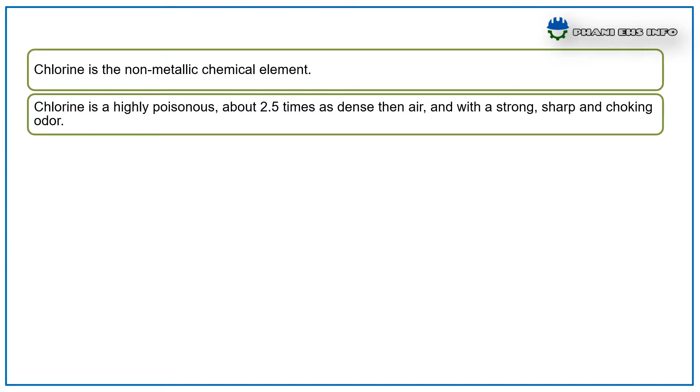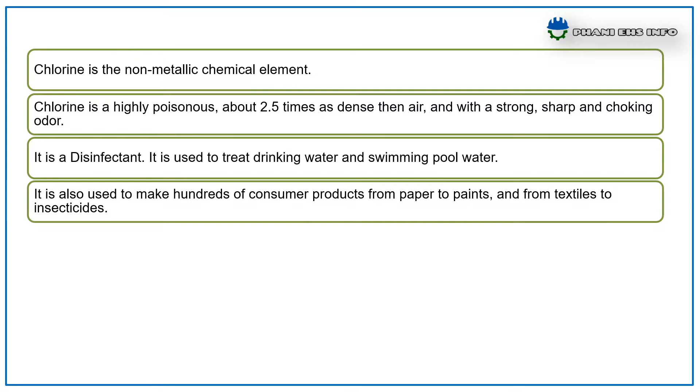Chlorine is a non-metallic element. It is highly poisonous, about 2.5 times denser than air, with a strong, sharp and choking odor. It is a disinfectant used for drinking water and swimming pool water, and is also used to make hundreds of consumer products, from paper to paints and from textiles to insecticides.

Another major use of chlorine is in organic chemistry, where it is used as an oxidizing agent and in substitution reactions. 85% of pharmaceuticals use chlorine or its compounds at some stage in their manufacture. Chlorine gas is itself very poisonous, and it was one of the first poisonous gases used during the First World War.

The properties of chlorine: it is a greenish yellow gas with a strong, sharp, choking odor. Vapor density is 1.4 grams per liter at 20 degrees centigrade, melting point minus 101 degrees centigrade, boiling point minus 34 degrees centigrade. Chlorine is not flammable, but it reacts explosively or forms explosive compounds with many common substances. Water solubility is 7.30 grams per liter.

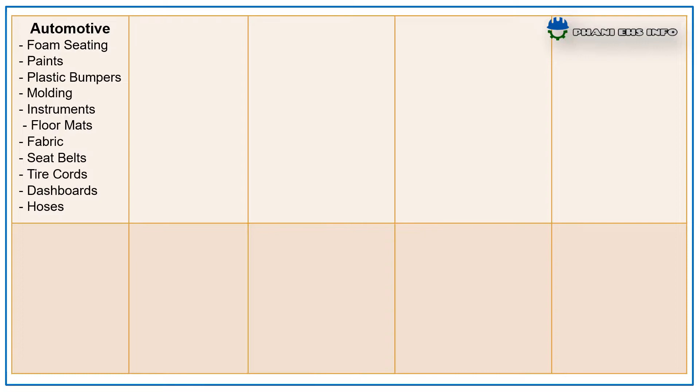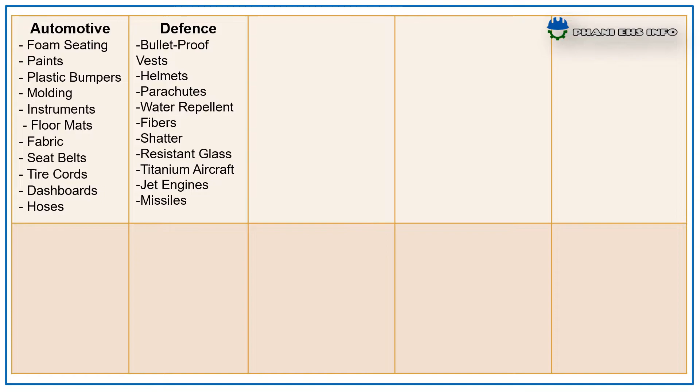Chlorine is used in many ways in many industries. In automotives, for foam seating, paints, plastic bumpers, molding, instruments, floor mats, fabrics, seat belts, etc. For making bulletproof vests, helmets, parachutes, water repellents. For healthcare, electronic instruments, sterile packaging, surgical equipments, cleaning compounds, prescription eyewear, laboratory reagents.

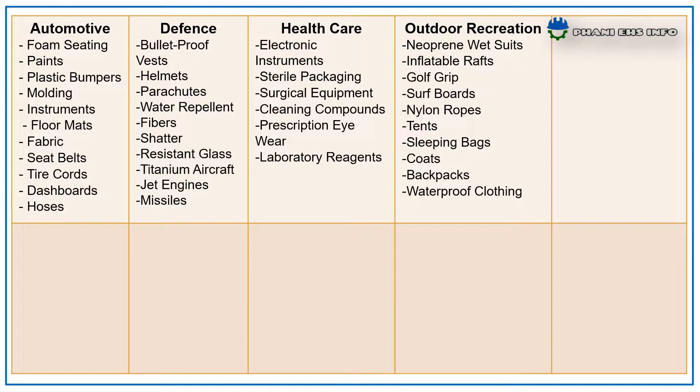For outdoor recreation: neoprene wetsuits, inflatable rafts, golf grips, surfboards, nylon ropes, tents, sleeping bags, coats. In construction: carpeting, wire insulation, pipes, siding, flooring, paints, coatings. In electronics: semiconductors, computer disks.

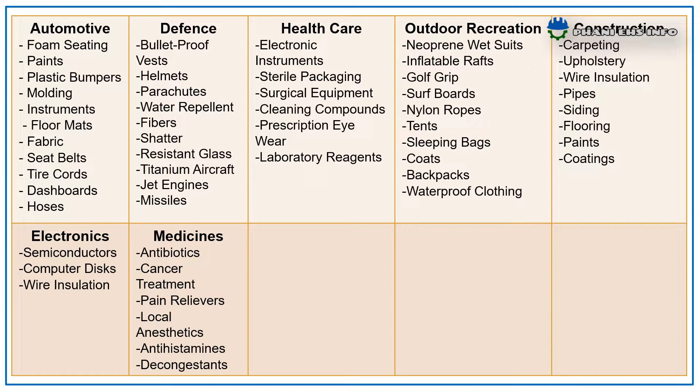In medicines: antibiotics, cancer treatment, pain relievers, water treatment for drinking water, wastewater treatments, food production and handling, herbicides, vitamin B1 and B6, disinfectants, and metal products like manufacturing of magnesium, nickel, titanium, zirconium, etc.

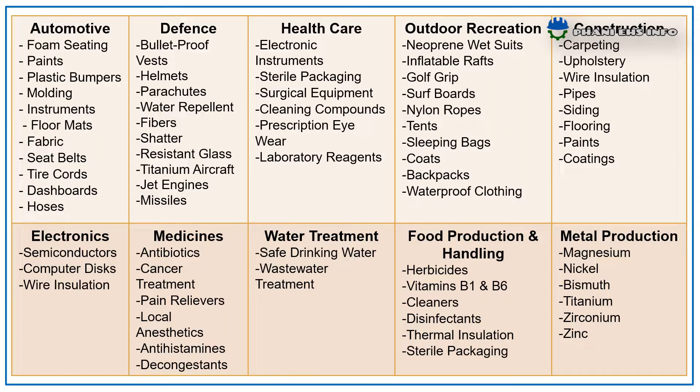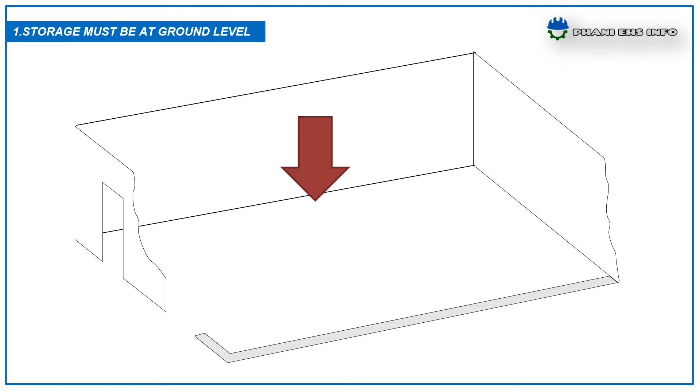What are the basic requirements for a chlorine gas handling area? Chlorine room and cylinders must be at ground level. The building should be constructed so as to contain a chlorine leak. The door must open outward, preferably to the outside, and have a crash bar.

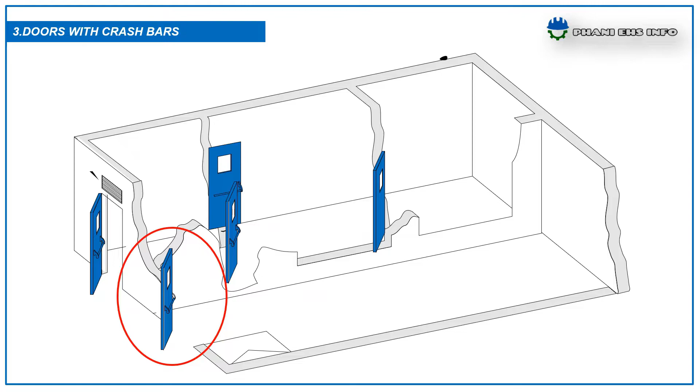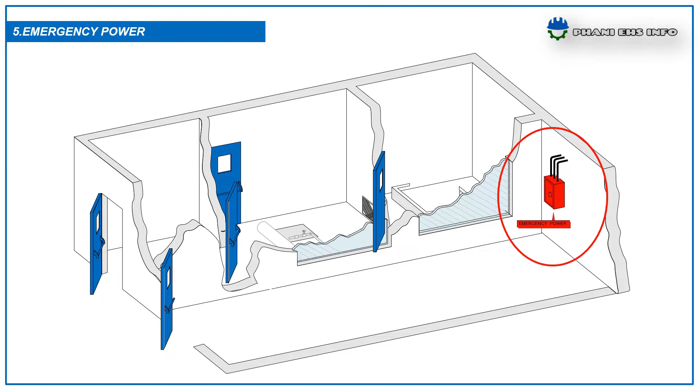To reduce frequent entry into the chlorine room, there should be a glass window between the chlorine room and some portion of the mechanical area. Emergency power must be available to handle the exhaust scrubber and, if necessary, the fire sprinkler system. A ventilation system should be provided to allow fresh air to enter the room near the ceiling.

A dedicated scrubber system containing a caustic soda system should be arranged. An emergency eye wash and body wash shower must be provided. An overhead sprinkler system must also be arranged, designed to produce maximum flow for at least 20 minutes.

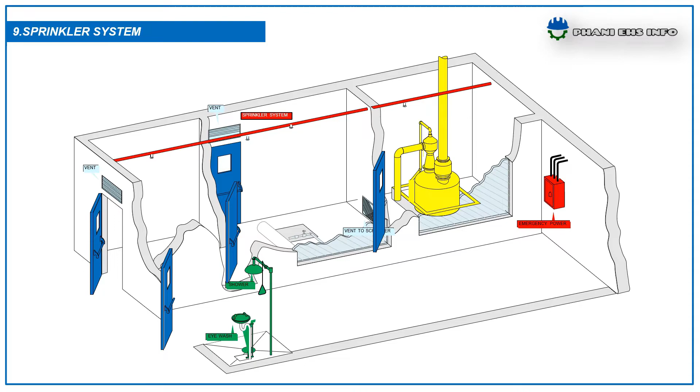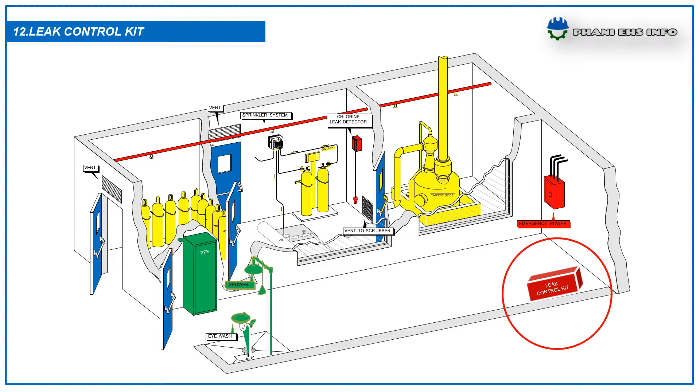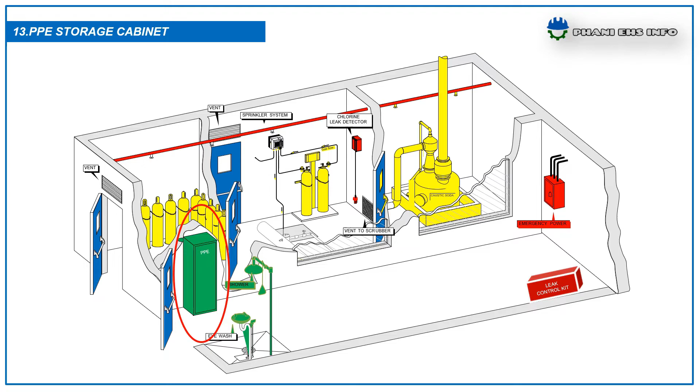Chlorine room and storage area must be equipped with chlorine leak detectors. A dedicated cylinder storage area with all safety measures should be arranged. A leak control kit must be available for use in case of emergency or minor leaks. A cabinet must be available to store all required personal protective equipment. Chlorine storage and handling areas must be provided with safety instructions and required signage.

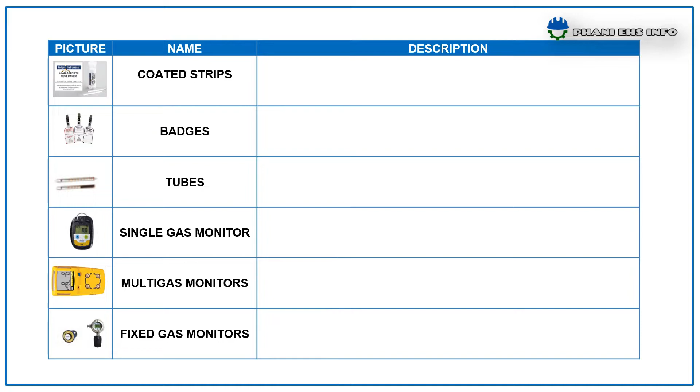How to detect chlorine? It can be detected using different methods like coated strips, badges, tubes, single gas monitors, multi-gas monitors, and fixed gas monitors. First, coated strips: these usually turn yellow to orange due to chlorine, and the degree of color indicates the gas concentration.

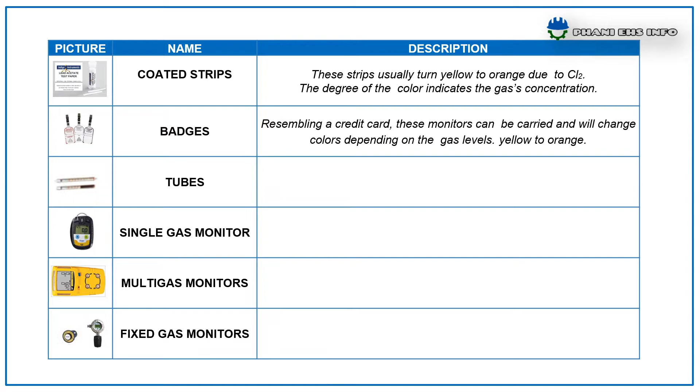Badges resemble a credit card; these can be carried and will change color depending on gas levels, yellow to orange. Tubes are about the size of a pen and provide an approximate measure of chlorine concentration; the tube changes color depending on the chlorine level.

Single gas monitors can be used for continuous monitoring and carried individually. Multi-gas monitors are used to check gas levels in the work atmosphere periodically, and fixed monitors are located at the work location for continuous monitoring.

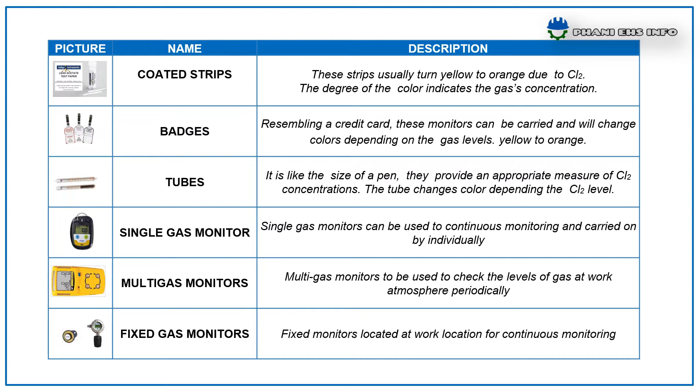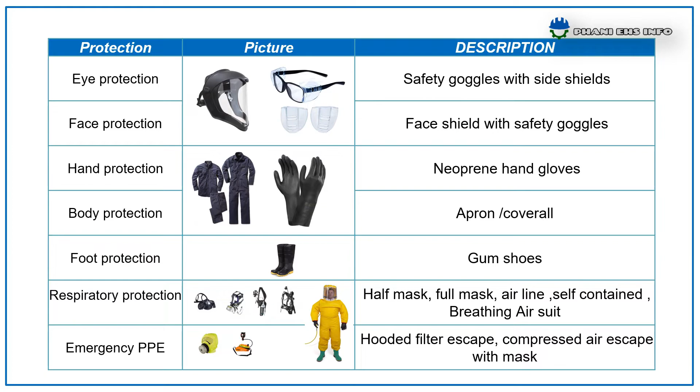The health effects of chlorine exposure.

Blurred vision, burning sensation in the eyes, nose, throat and eyes, fluid in the lungs, pulmonary edema, nausea and vomiting, watery eyes, wheezing, coughing, chest tightness, difficulty breathing or shortness of breath, burning pain, redness and blisters on the skin. These are the health effects if exposed to chlorine.

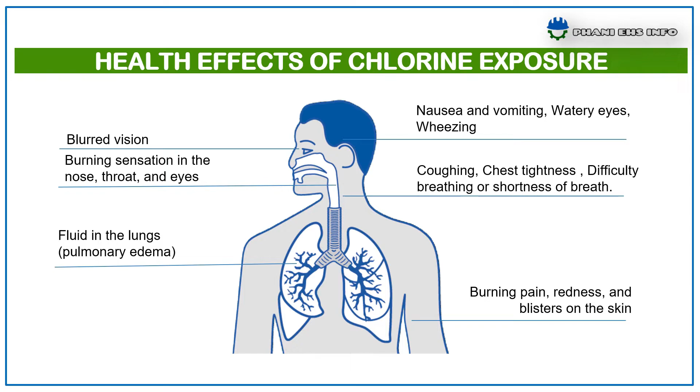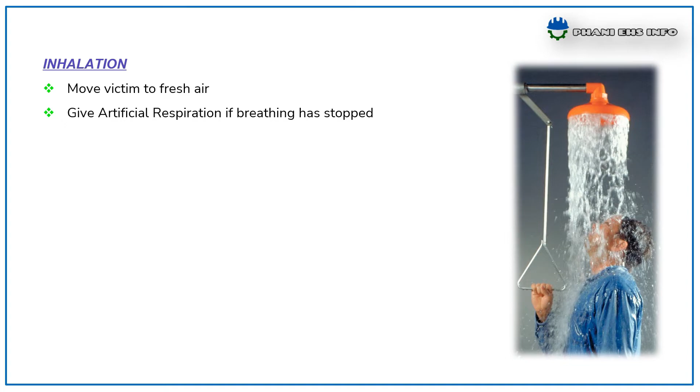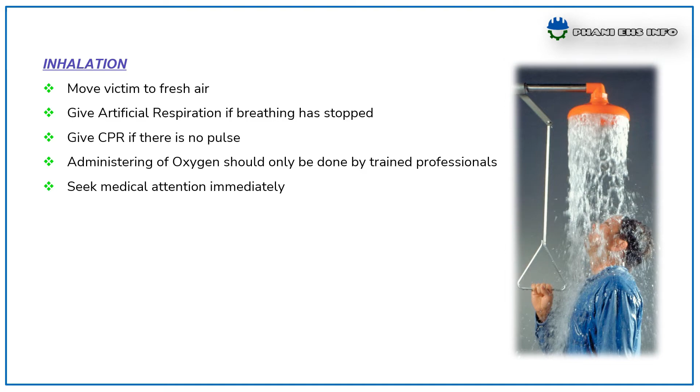The first aid treatment for chlorine exposure: In case of inhalation, move the victim to fresh air. Give artificial respiration if breathing has stopped. Give CPR if there is no pulse. Administration of oxygen should be only done by trained professionals. Seek medical attention immediately. In case of skin or eye contact, flush the area with continuous streaming of water.

Flush for 20 minutes and seek medical attention. Do not transport victim until flushing has completed. Do not use ointments without medical direction.

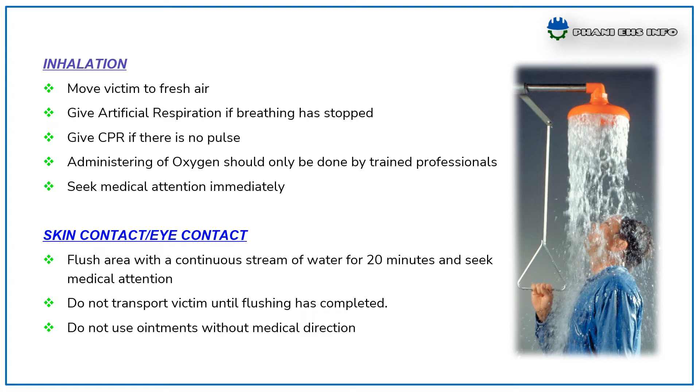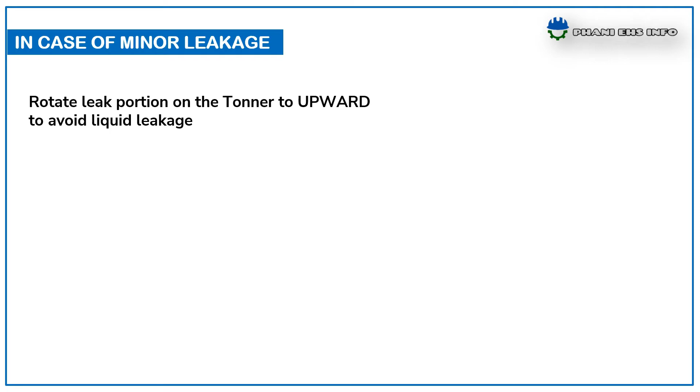In case of minor leakage, rotate leak portion on the tonner to upward to avoid liquid leakage. Whenever you notice any smell or minor leakage from tonner or line, immediately move to upwind direction and check the leakage with ammonia torch. If you notice white fumes, inform the same to your supervisor and safety team through walkie-talkie

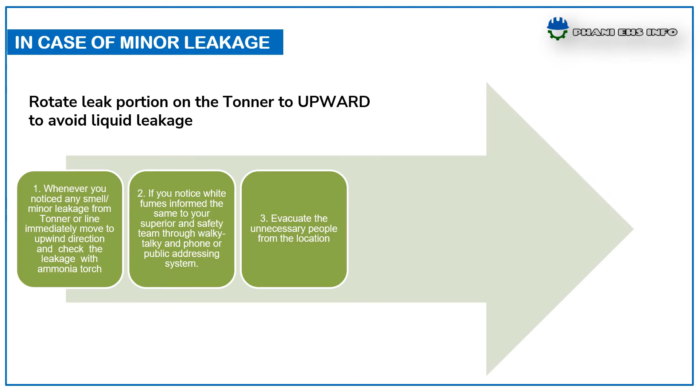or phone or public addressing system. Evacuate unnecessary people from the location. Use recommended PPE and spray soda lime on the leaked area. Emergency crew will control the leakage by using a toxic gas leak control kit.

If the leak is on the line, then one end of the valve will be kept in closed position and the other end will be connected to the scrubber.

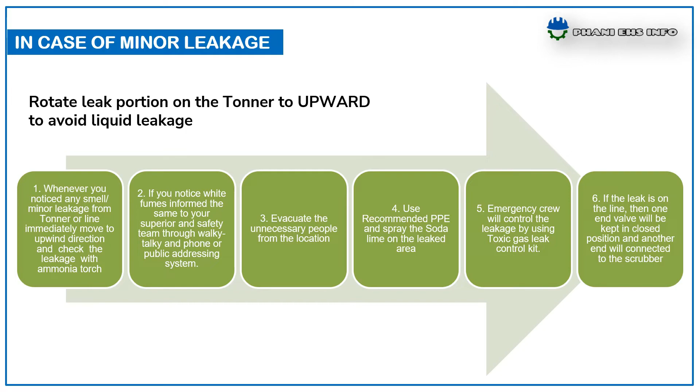In case of major leakage, rotate leak portion on the tonner to upward to avoid liquid leakage. If the chlorine gas suddenly escapes, the premises affected must be vacated in all haste. Whenever a leak develops in a gas line or tonner, all personnel in the immediate vicinity should be evacuated towards upwind of the leak.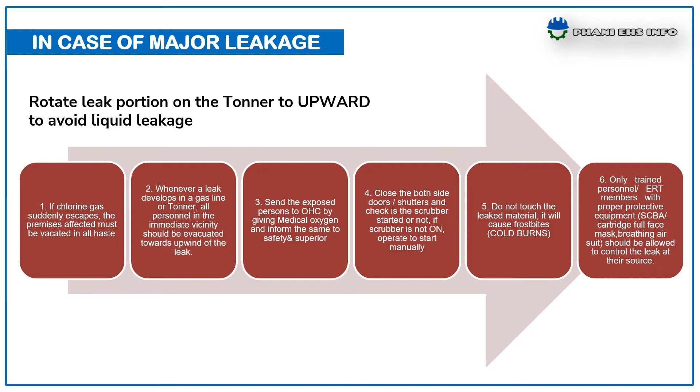Do not touch the leaked material. It will cause frostbite, which means cold burns. Only trained persons, ERT members with proper protective equipment like SCBA, should be allowed to control the leak at its source.

The safety instructions for handling and storing of chlorine gas: Keep the Tonners away from heat. Do not store flammable or explosive materials. Never drop Tonners. Be sure connections are tight without any leak.

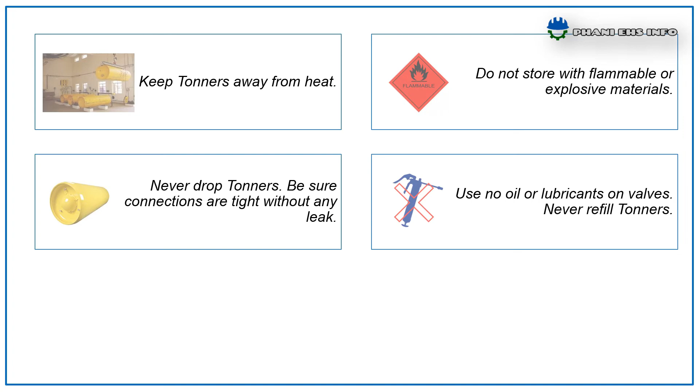Use no oil or lubricants on valves. Never refill Tonners. Frequently check the pressure gauge on the Tonner. Provide a safety valve on the manifold header.

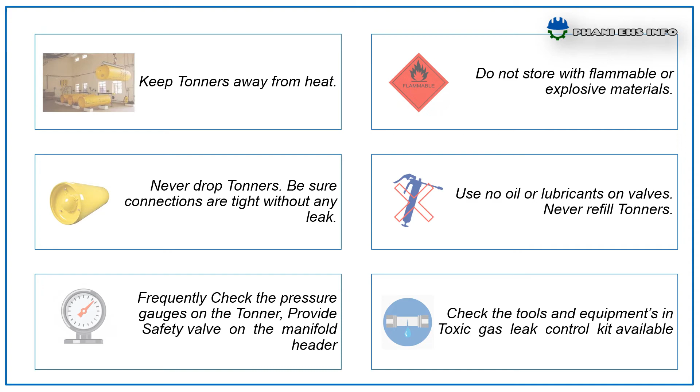Check the tools and equipment in the toxic gas leak control kit available. Ensure ammonia solution in a bottle is available to check leakages. Unload chlorine Tonners with mechanical or electrical hoist only. Make sure availability of neutralizing agents: liquid lime, soda ash and sodium hydroxide, 5% lime solution or lime powder.

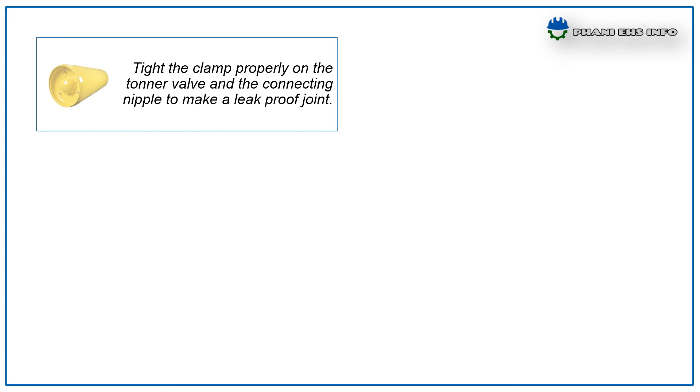Do not remove valve protection hoods before unloading. Do not drop Tonners on hard ground where there are pebbles or iron rods. Chlorine cylinders should not be stored above 2 layers. Tighten the clamp properly on the Tonner valve and the connecting nipple to make a leak-proof joint.

Use lead washers. Do not use rubber washers or steam gasket washers. Do not use rubber hose for chlorine gas transfer. Use seamless copper tube and CS piping. Never conduct a welding activity on the cylinder.

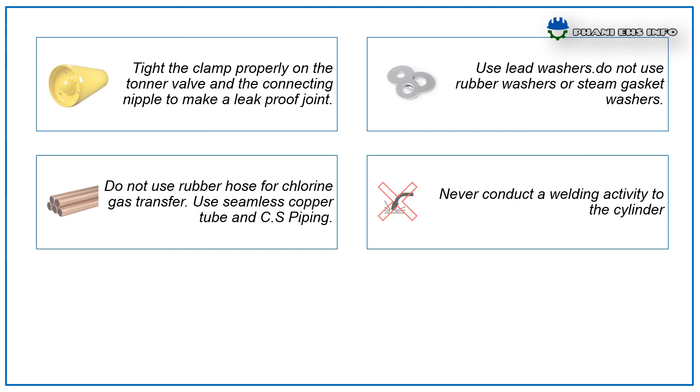Periodically check the functioning of the scrubber and scrubber solution pH readings. Periodically check the pressure gauges and sensors, and emergency lamp conditions. This is about chlorine gas safety. Hope you understand.